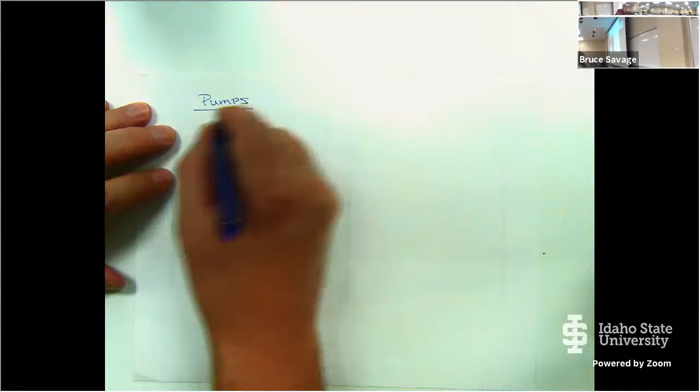So pumps. We can have positive displacement pumps. Positive displacement pumps, as we talked about on Wednesday, are pumps that are physically moving a volume of water or fluid, whether that is in an open system or a closed system.

A closed system would be like a screw that has a pipe around it, or gears that are moving. An open system would be like a fan, or you could even consider almost a boat impeller. You can argue over that too, but a boat impeller is actually moving fluid, whereas a plane propeller is creating a pressure differential. So there are slight differences, but you could almost consider those the same thing.

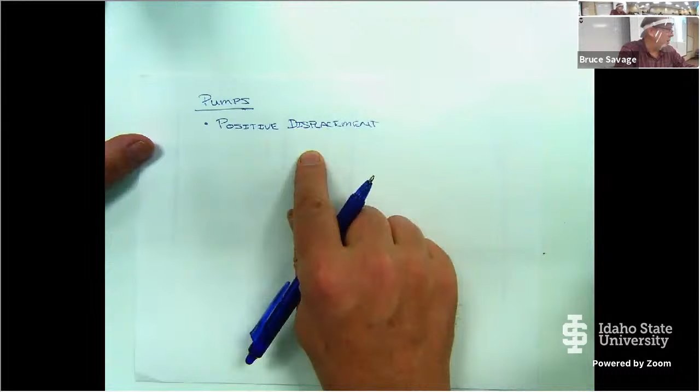But like a fan in a room that's moving air, that's pushing a positive volume of fluid in a given direction. So positive displacement pumps generally do not care about pressure so much, unless you reach a maximum pressure and they can no longer push. They push the same volume every time as long as it's within their system capabilities.

Civils use these all the time, like for water treatment. If we're putting fluoride or chlorine in the system, we want to meter out a certain volume of the fluid, and so those are fairly easy. You just hook them up to the system, set them for the volume you want, or connect it to your computer system, and it works great.

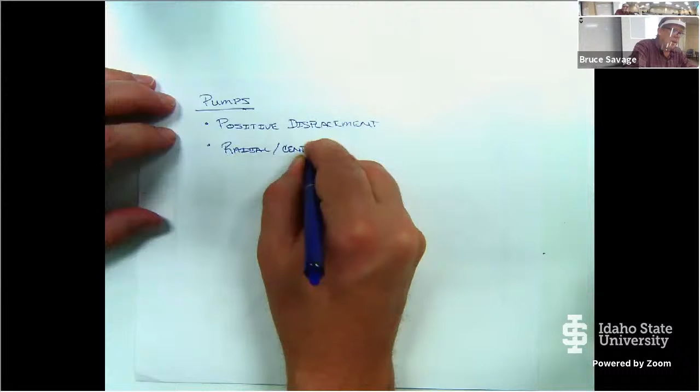The other type we talked about was the radial pumps, radial or centrifugal. I should be a little careful with this term radial because it actually has a dual meaning. We can actually classify a sub portion of these pumps by radial.

Let me show you a little picture here. Well, this is rather interesting. I finally got the book, and in fact they sent me two books now. I didn't get the original one, so I complained and said send me an electronic copy. They didn't, and all of a sudden two books show up, and I see that they've changed things. What is chapter 12 in the old book is now chapter 11 in this new book, which makes me interested.

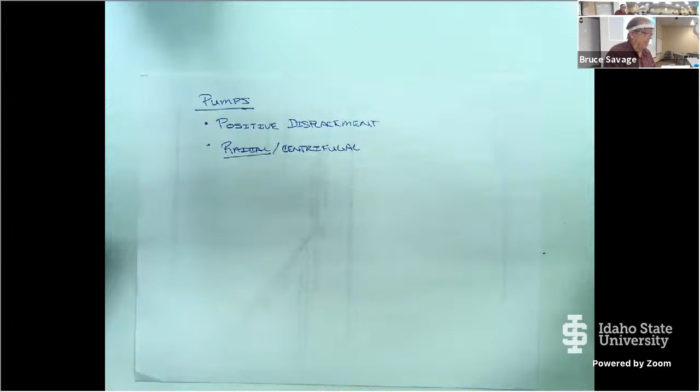I told you to read 12, because I was basing that on the old one. There's a while back, another one you told us to read. Oh, and it was different? Yeah. Oh well, I apologize, I thought the chapters were the same thing. I haven't even taken the time to pop this open. I just grabbed it today and said, okay, we're going to talk about this. So it's chapter 11, my apologies.

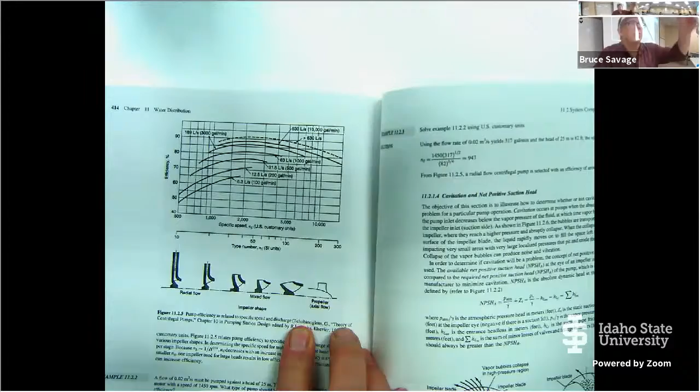We are on chapter 11 now. It's called Water Distribution. Let me zoom in right here. Okay, so there is a figure in here.

And this is 11.2.5. Pump efficiency is related to the specific speed and discharge. So this is a little bit difficult to understand, but...

Radial flow is like a disc that has curved vanes in it, and the water comes into the middle. The vane is like an arm that swings the fluid, except it's actually curved this way. So if it's rotating this way, it flings the fluid, and the farther out you get on that curve, the more rotational velocity you have, because there's a bigger lever arm, right? So it imparts a large amount of velocity to the fluid.

And then if you come over here, you have a propeller. This would be like your plane, or I think I called the boat an impeller, but actually it's an impeller if it's inside, a propeller if it's outside. We can also have propellers inside pumps, and those we call axial flow.

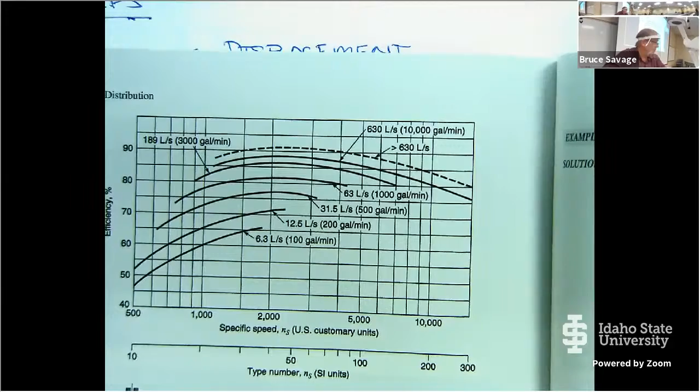And those are almost-- oh, I'm sorry, let me zoom back out here a little bit. Thank you for mentioning that. I really need a screen in front of me so I can see what's on there.

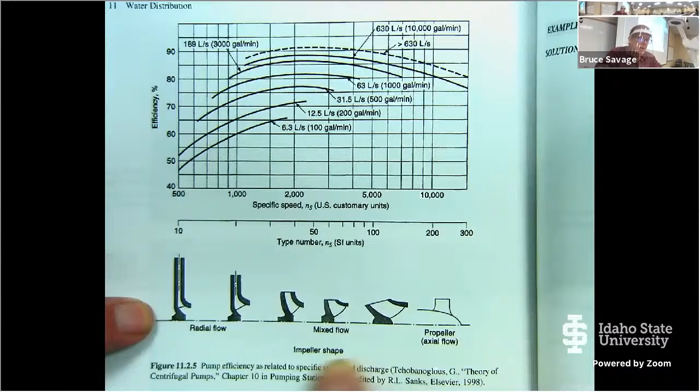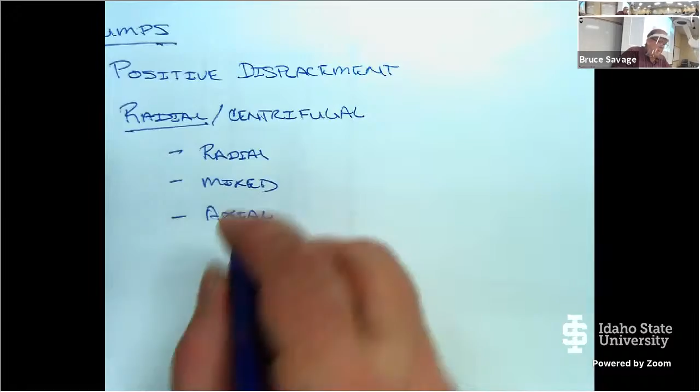All these radial, mixed, and propeller types are still centrifugal type pumps. We're going to talk about the characteristics of a centrifugal pump, but I want you to know how to pick which type of centrifugal. So underneath this right here, I could put specifically radial, mixed, and I would call it axial--rather than propeller, I like axial better.

Alright, so this is pretty easy. There's something called the specific speed, and it's down on the bottom of this page. Let me see if I can bring it up here. I'm not going to go through the derivation of this just yet, because we will get to this when we talk about the similarity laws, but specific speed is fairly simple.

So equation 11.2.7, the specific speed, noted as N sub S, is what we call the coefficient of Q to the 1/2, coefficient of H to the 3/4, and we break it all down. What it comes down to is this: the specific speed is N, that's the rotational speed of the pump, in RPMs--how fast is the pump rotating. N is RPMs, Q to the 1/2, and then the head that the pump adds, to the 3/4.

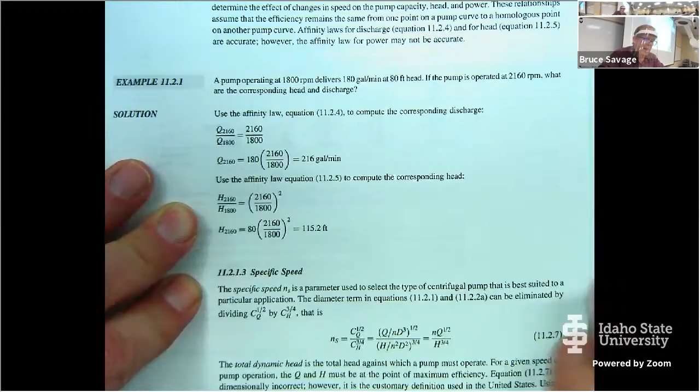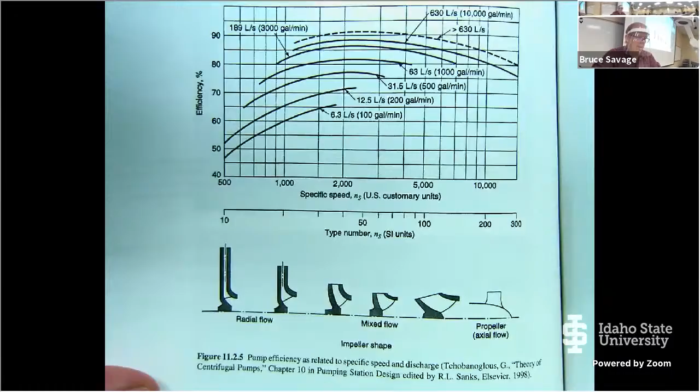So we can actually plug this in and calculate the specific speed. And if we do that, we can come back around over here and use this graph. Now you need to be careful: specific speed is usually calculated in the US system using gallons per minute, and head is in feet.

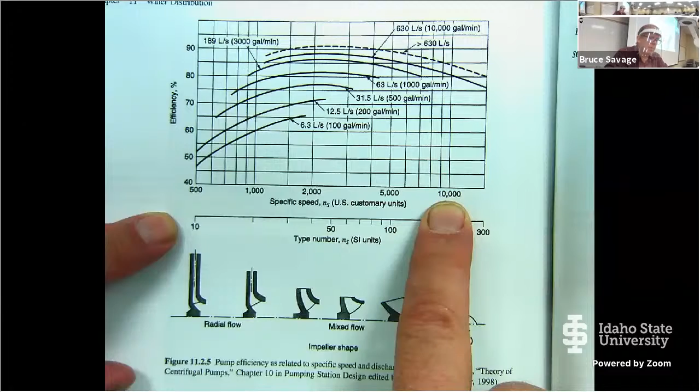Okay, if I remember correctly, yeah, that looks like it. So noting here, on this axis where my finger is at, we have the specific speed in US customary units, and down here on this axis, we have it in SI units. So let's say I had 2,000, I would come up here, and come straight down to this part down here. So at 2,000, I'd come down and say, oh, I want a mixed type impeller.

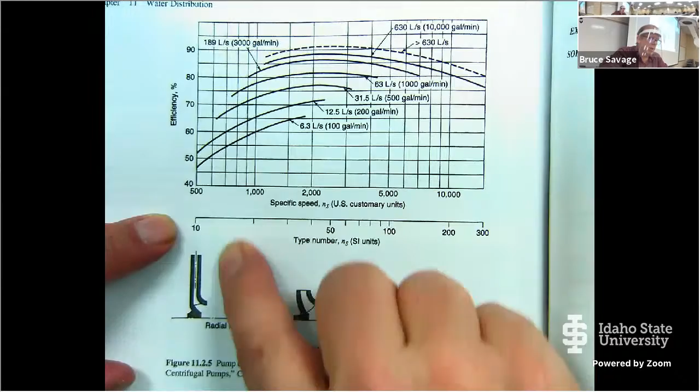Okay, if I'm over here, say at maybe--not 20, that's 500, so we'd say about 700--I'd want a pure radial flow. And here's the concept: we don't really use this to size pumps. We're going to get into pump curves, and that's where you actually size a pump. But this kind of tells you the type of centrifugal pump to give you an idea of how it's going to behave. Radial flow pumps are really good for high head, low flow.

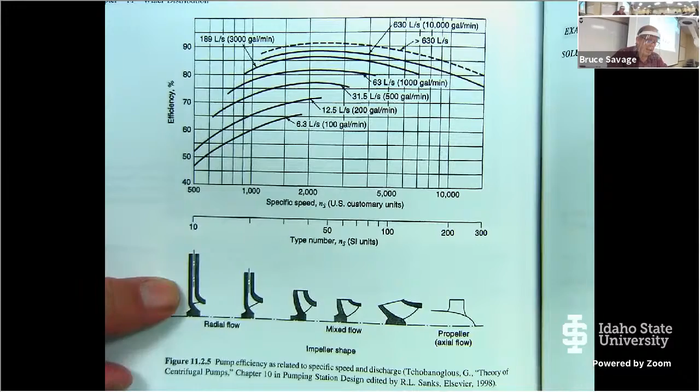So if you have to pump the water a long distance up, you're going to want a radial pump. If you need low head, high flow, you want axial flow. And if you get farther into pumps, those have a little more specific meaning to them, but I think we need to delve into how these pumps behave first before we go too much farther. So simply by using this equation, we can calculate, let me scoot this back up.

There's an example down here at the bottom of your book. So stick in the rotational speed, which is 1,450 revolutions per minute. In this case, it has a flow of 0.02 cubic meters per second, and we know we're pumping against a head of 25 meters. That gives us our specific speed.

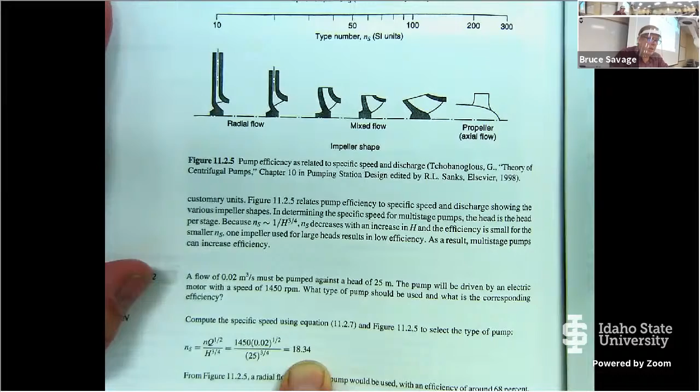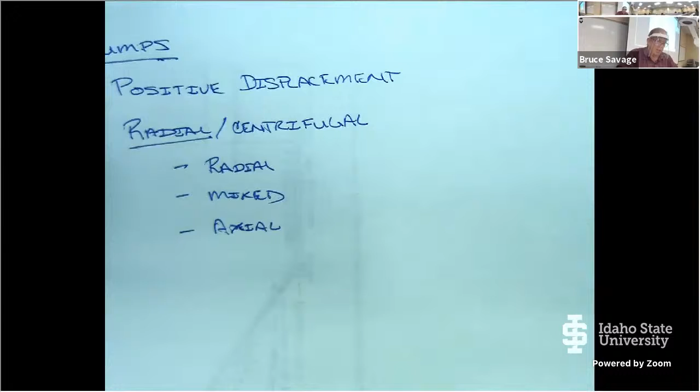Now, let's talk about characteristics. But before we do that, we want to define what's called a system curve.

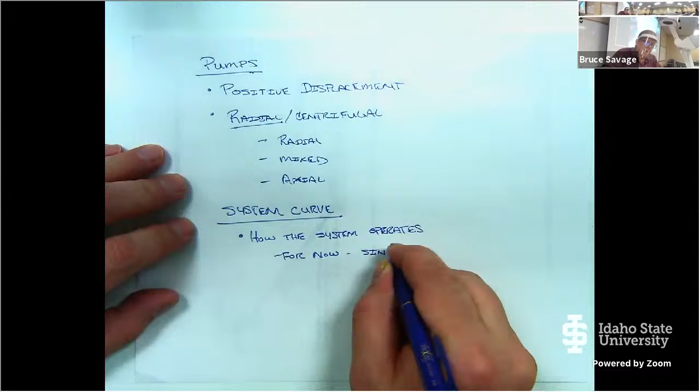A system curve would be defined as how the system operates. Right now, for now, we're going to use a single pipeline. We're going to go back to basics, single pipe, okay?

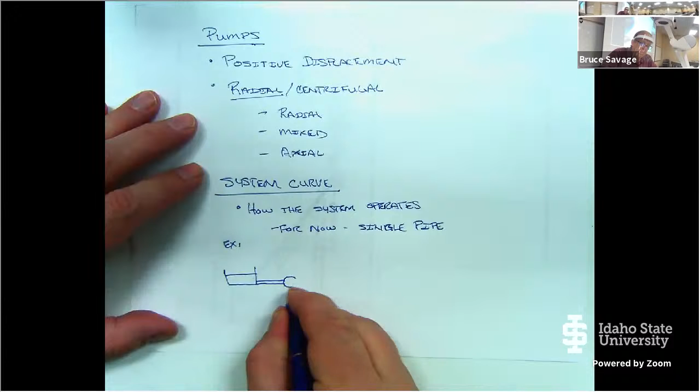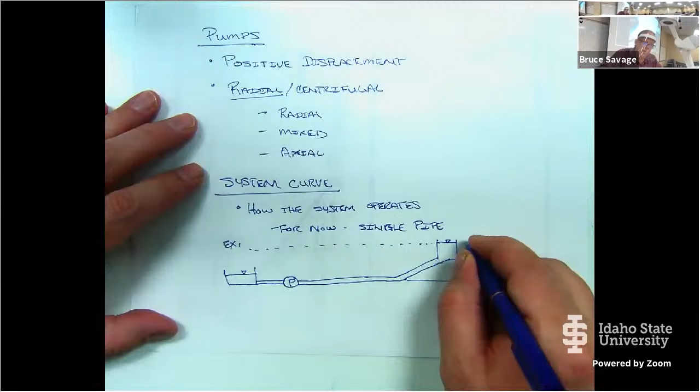So, a little example here, if you will. If I have a reservoir down here, and it's connected to a pump, and it pumps it over so far, and then goes up a hill, and fills some reservoir up on top of this hill. We can look at this as Z sub 2, and over here is Z sub 1.

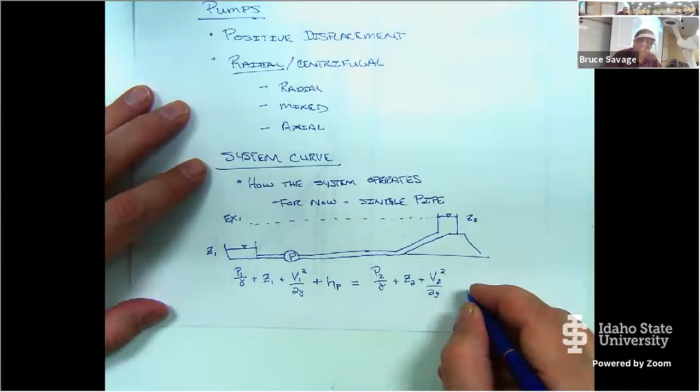So if I write my standard energy equation, P sub 1 over gamma plus Z sub 1 plus V sub 1 squared over 2G. Now I know I have a pump in there, and the pump's going to add energy, so I'm going to say plus the head of the pump, H sub P. And you got to be careful, we also use H sub P for horsepower, or HP for horsepower, not necessarily H sub P, but HP for horsepower. But this means head of the pump in this scenario, all right? That then is going to equal P sub 2 over gamma plus Z sub 2 plus V sub 2 squared over 2G plus the head loss, which we have now defined as CQ squared.

We've simplified friction times length over diameter. We've simplified all that, made it easier. So note that if I take this, P sub 1 goes to 0, P sub 2 goes to 0, V sub 1 goes to 0, and V sub 2 goes to 0.

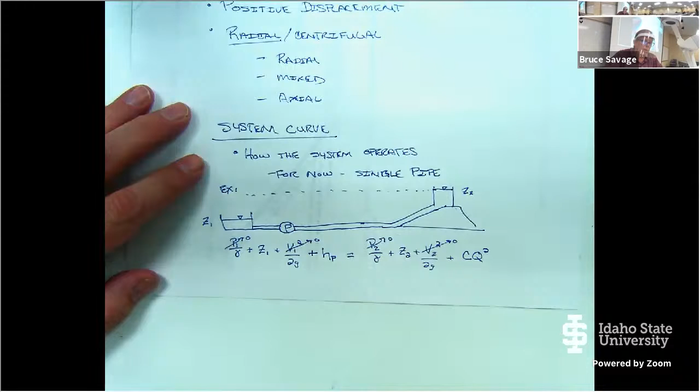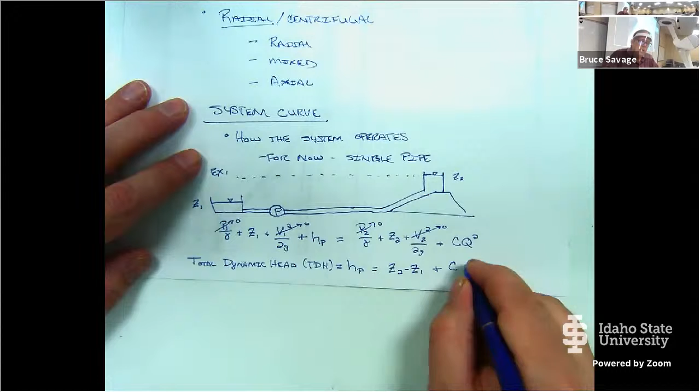And we're going to define something then as the total dynamic head, or TDH, total dynamic head, is equal to the head of the pump that's required for this system, H sub P, which now is equal to Z sub 2 minus Z sub 1 plus CQ squared. So now I can actually make one other change to this. The total dynamic head, the TDH, is equal to delta Z plus CQ squared.

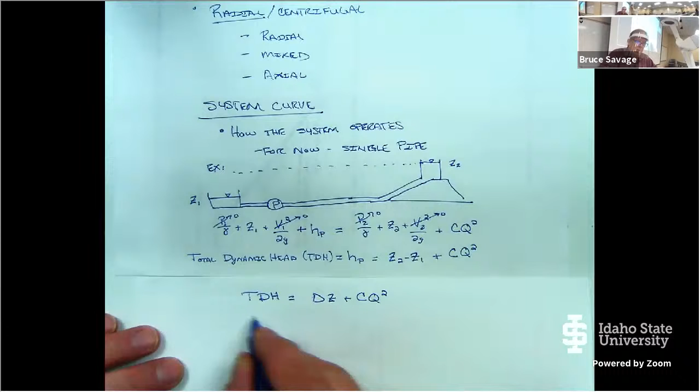This is the system curve. Right there is the system curve. Tells us how the system behaves. All right, let's look at the equation a little bit.

Before I can even get one drop of water to move in this system, I have to lift it up this distance, delta Z. I have to impart enough energy to lift it up to delta Z. So if my pump only has the ability to lift the fluid up 40 feet, and my difference in my reservoir is 50 feet, how much flow am I going to get? Absolutely none, right? Absolutely none.

But once I get flow moving, once I get a pump that will send it that high, as soon as I get it moving, now I have friction to overcome as well. So my pump has to overcome both friction and that delta Z. And the more flow I push through my system, what happens to the friction? The more flow I push through my system, the higher the velocity, therefore, the higher the friction, right? So we have this balancing act where I can push less flow and have less friction, but if I try to push more flow, then my friction goes up.

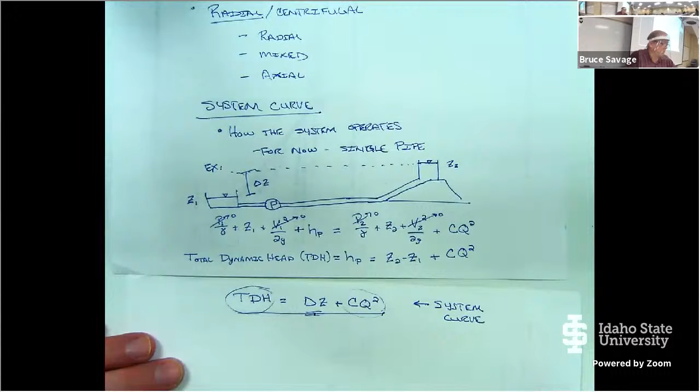Okay, so now we can look at a pump curve. Now, a pump curve, this is for, once again, centrifugal pumps only.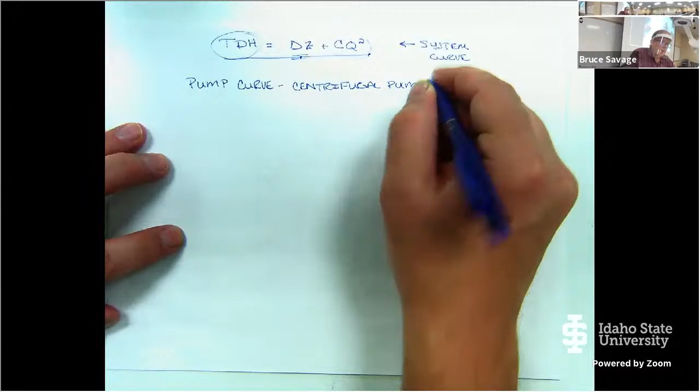Okay, rotational pumps.

So if we go ahead and define a standard Cartesian axis where we have flow on the bottom, Q, and head on the y-axis. Head is going to be defined as feet. Flow could be defined as cubic feet per second, cubic meters per second, but we generally do not do that in industry.

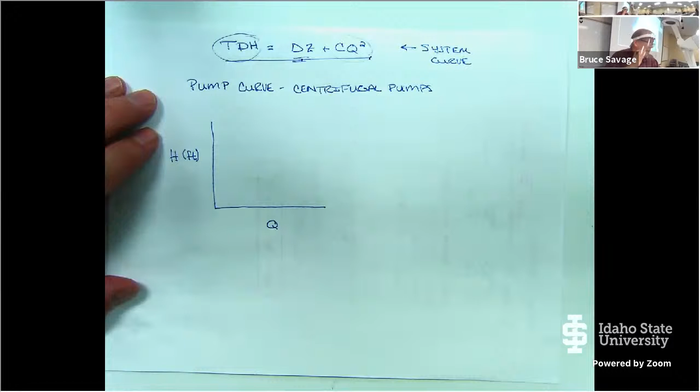When we buy a pump, it's based on gallons per minute, or a lot of times liters per second. Now, you got to be careful in the metric system. Sometimes it may be liters per minute. Sometimes it may be cubic feet, or I'm sorry, cubic meters per second.

I think we go back to figure 11.2.5, where we talk about that. I'll throw it back up here. They've shown it in liters per second, gallons per minute, which is the industry standard.

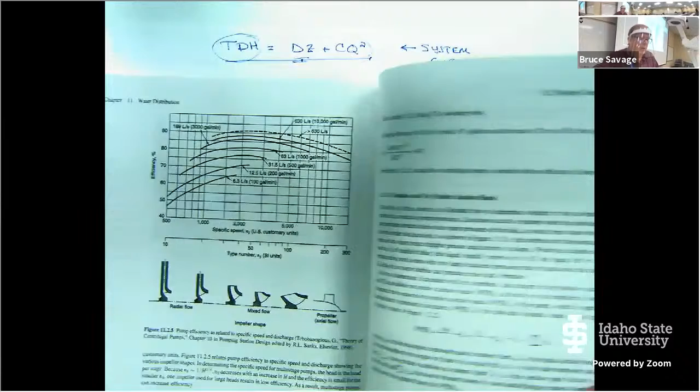Okay, now why do we do that? That's so you can make more money, right? You understand it, and the common person doesn't. But I'm half kidding there, but I'm half serious.

All right, so a pump curve then defines the operation of the pump. So pump operation parameters, let's say it that way. The pump curve defines the pump operation parameters.

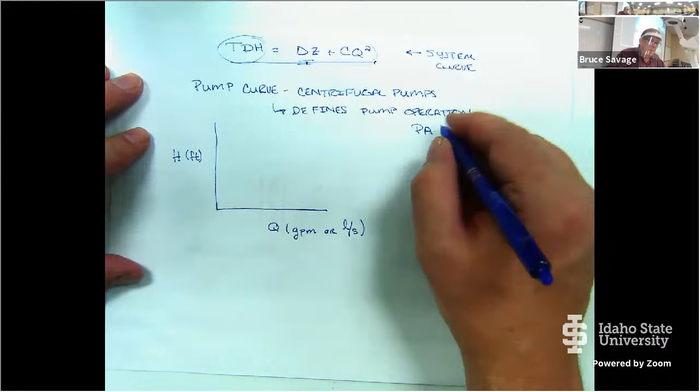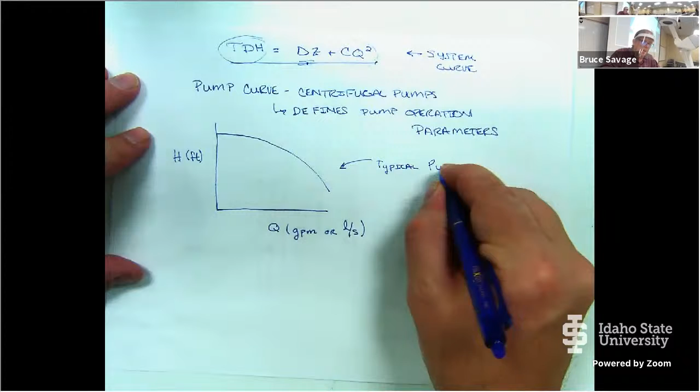Okay, so a typical pump curve looks something like this. So typical pump curve. The curve concept, pump curve, tells you that it's not linear necessarily. Now there are some pumps that behave close to being linear, but not all, and most of them have a little bit of curvature going on.

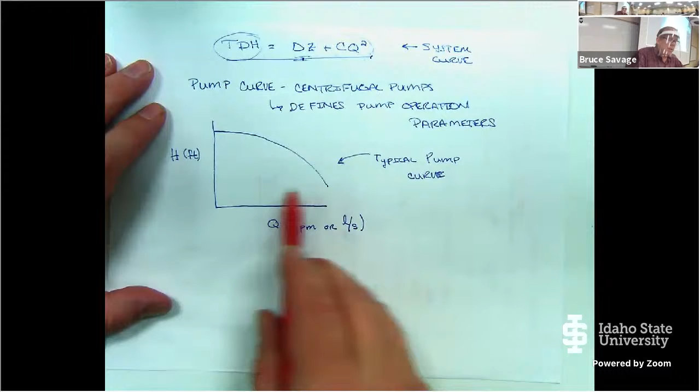We have also, so this curve then defines the relationship between flow and head. A pump can provide more flow if it has to be at less head. So if I'm pumping against this head right here, I can provide this flow. So this H sub 1 is correlated to Q sub 1, right?

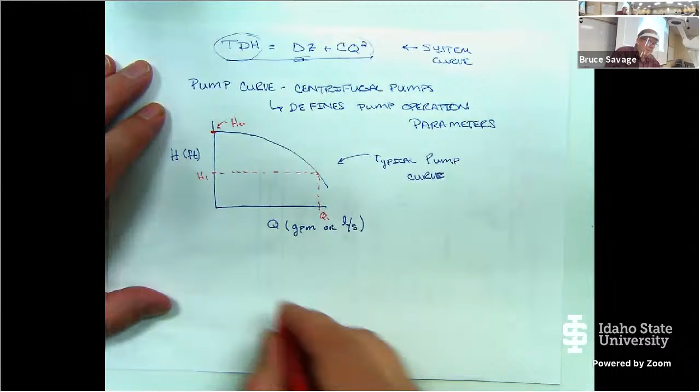I also have a point up here, I'm going to highlight, we're going to call this H sub naught. I'll come down here and say H sub naught is defined as the shutoff head. This means that if the pump is pumping up against a valve that is shut, it's pumping up against a dead line, there's nowhere for the water to go, it will add this amount of head to the system, but there's nowhere for that water to go.

And pumping against shutoff head is not good for pumps. They tend to cavitate, it tends to ruin them. So you don't want to do it for very long. If you did it for just a little bit, it's no big deal. But long-term operation, if your system has you pumping against shutoff head, you're going to be buying a lot of pumps. Okay, but nonetheless, this defines then kind of the head that is added when there is no flow.

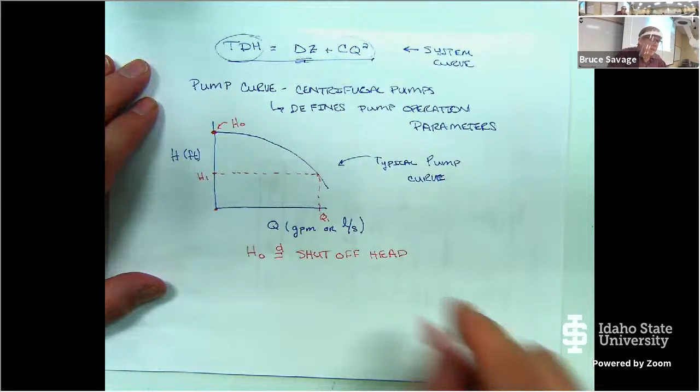Okay, and some pump curves actually have a little curve to them, so it's not always the highest head, but it's usually close, if not the highest. Once again, there could be a little bump right here since it is a curve.

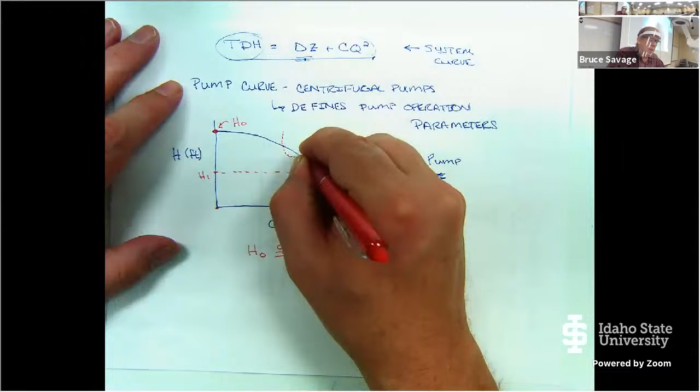All right, now that we have the shutoff head, we have the operation curve of the pump, we can now, well, there's also some other curves, or there's some other way of defining the efficiency of the pump. And usually this is with contour lines, but it could be defined with another curve.

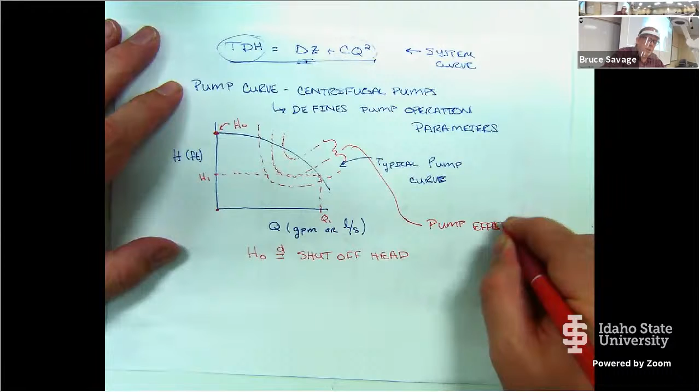Okay, so these curves right here represent then, I'm going to bring this down over here, the pump efficiency. Let's see, probably misspelled that, but how efficient is our pump? How efficient is it of adding power to our water system? Are we losing half of our power to operate this pump and the other half makes it to the water? Or does 80% go to the water and 20% go to the pump?

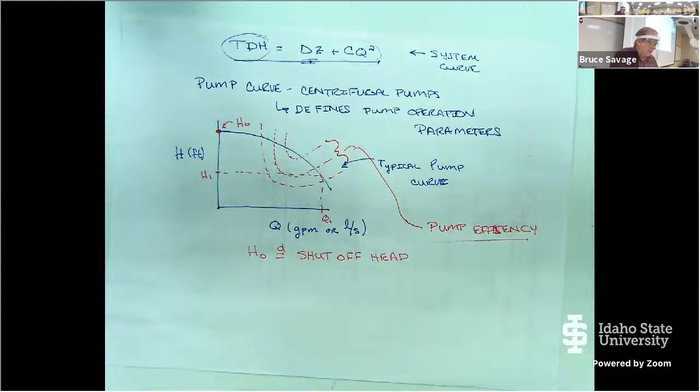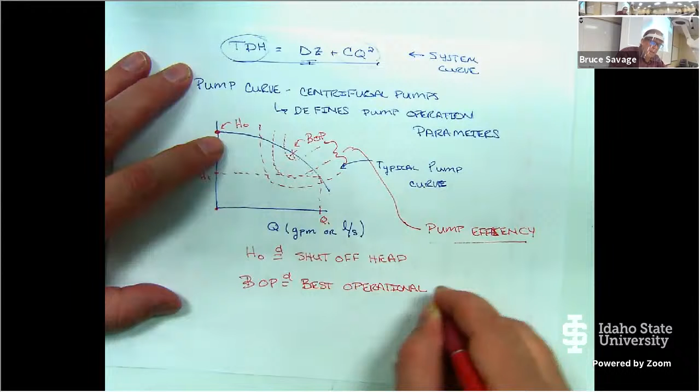Every mechanical device has some amount of inefficiencies, whether it's friction, loss to heat, whatever, they all occur, but these pump curves then define the efficiency, all right? And there's going to be, at the highest efficiency right there, we call that BOP. The BOP is defined as the best operational point, which is the highest efficiency.

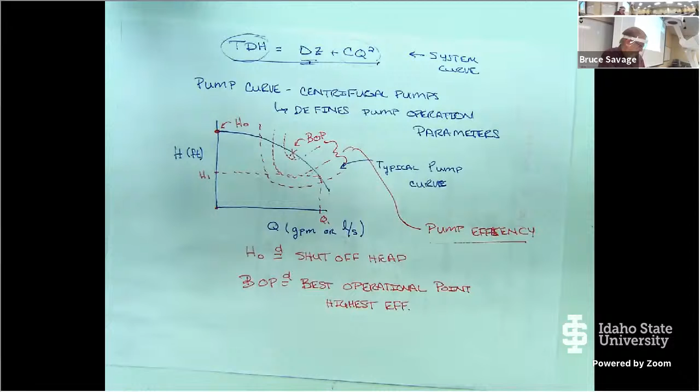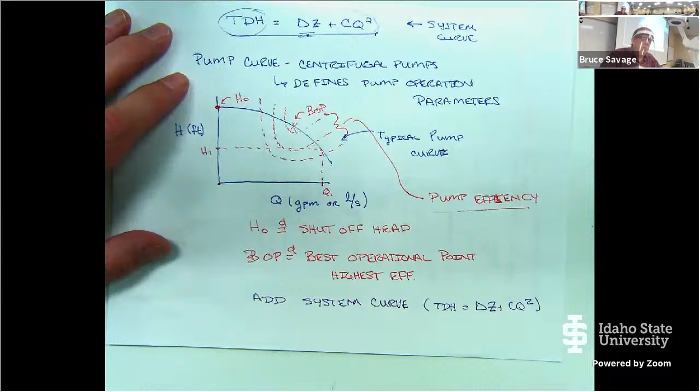Now, if I overlay my pump, let me flip this around. If I overlay my system curve onto my pump curve, so let's say now we want to add system curve. Okay, so remember the system curve, the total dynamic head is equal to delta Z plus CQ squared. So immediately I have some delta Z on my figure that I have to jump up to. So I'll come over here, and this right here then represents delta Z. I have to at least add that amount of energy before I get one drop to flow in my system.

And now I'm going to plot my pump curve. I'm sorry, I'm going to plot my system curve onto my pump curve. This then is my system curve.

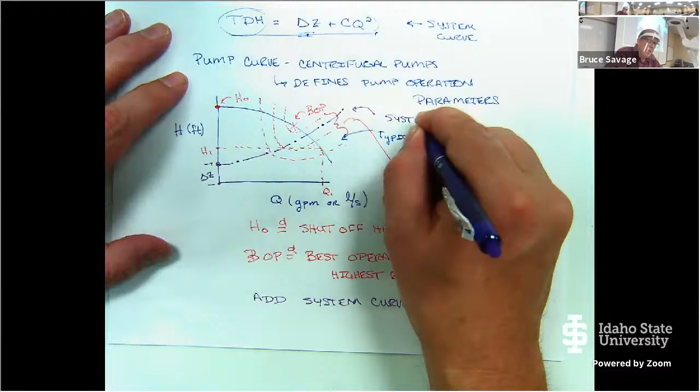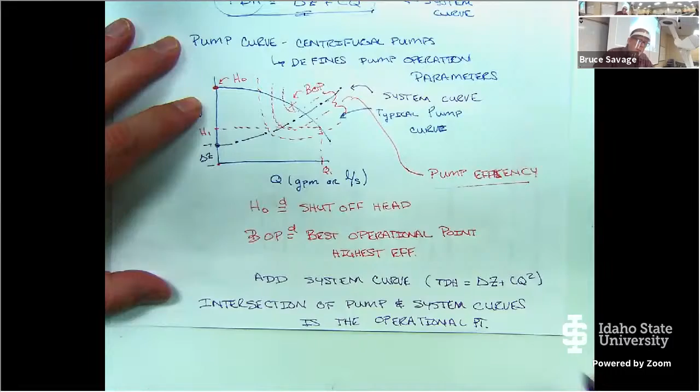The intersection of pump and system curves is the operational point. So let me go up there on my graph and we'll highlight that right up there. And that becomes then the operation point.

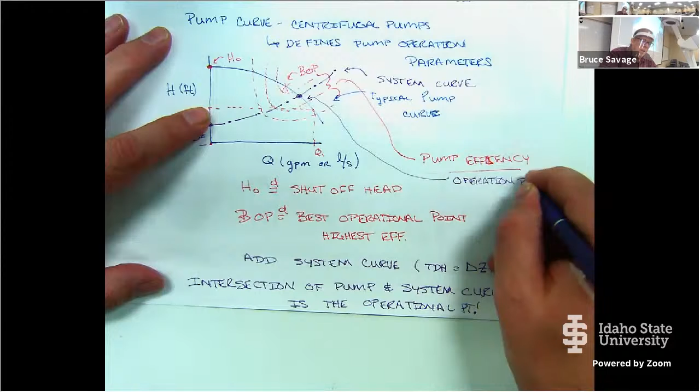That's how much is now flowing in my system.

So if I have a system that has a valve at the end of it, pumping water from one pond up to another pond on top of a hill, and I crank my valve down, what's going to happen to my flow rate? It's going to go down. What's the mechanics of it going down? What's the math behind it? You're increasing the K, the resistance in the fitting, and that increases the head loss in the system, which decreases the flow rate.

Good, so good. For those online, if you didn't hear that, by turning the valve down, we're going to increase our minor loss coefficient, the K, which is going to change our C value, which is going to increase the amount of minor loss in our total system. Mathematically, that gives us more head loss overall.

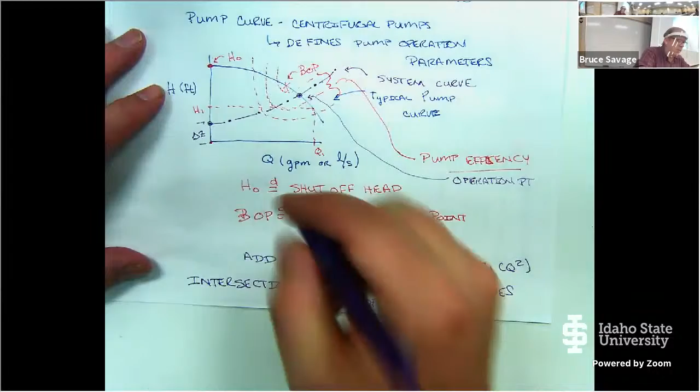On the figure, how does that work? If I change the C value and make it bigger, my curve is going to be more sharp, so my curve is going to come up here. This right here is the increase in losses. And now I've just changed my operation point, so now I have less flow pushing up against a higher head because I'm burning that head up in my valve.

And likewise, if I start to open the valve, now that curve changes, right? So I can now find where if I take a pump and stick it in a system, and if I know the curve for that pump, I can now define where my system is going to operate.

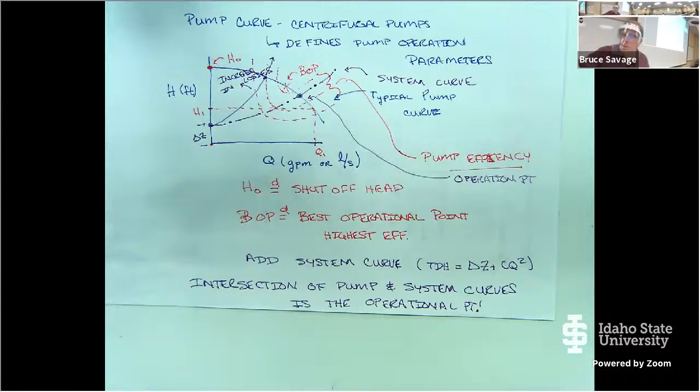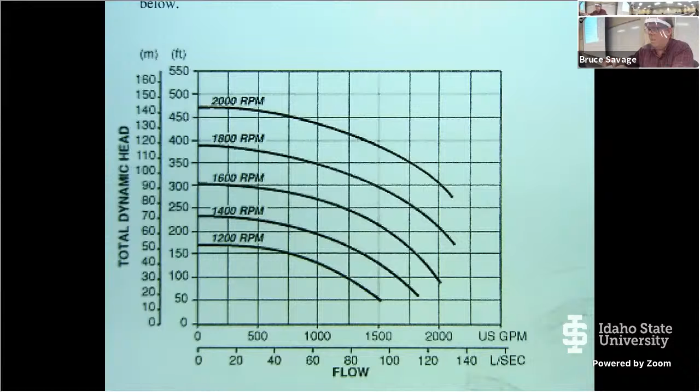Right there, I just had it here. Okay, so here's a simple pump curve, but it doesn't have the efficiencies on it. Let me grab this one here. This one does. Actually, do this one instead. Now this one doesn't have very much curve to it. That's okay because some of them don't.

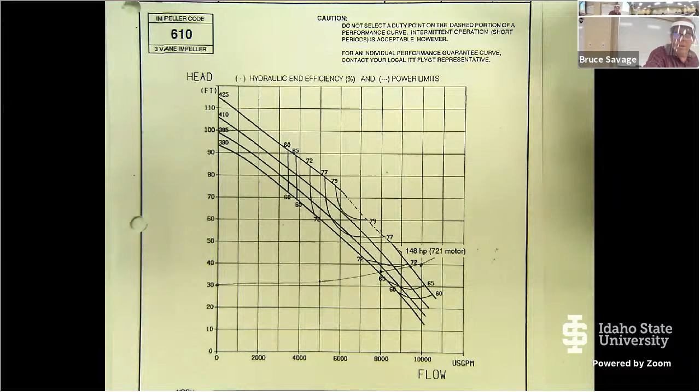Okay, so let's talk about back in the day, before the internet, which was not too long ago, by the way. You guys, well, it's always been here since you were born, huh? But it hasn't been around that long. We didn't have access to this on the internet, so pump companies would send out these big old binders, like a 3 to 5 inch binder. And when you needed to find a pump, you would pick a particular company, you'd start looking, and there's ways to narrow it down. It's not like you'd go through every page, and I'll show you how you can narrow it down. And you'd get the pump.

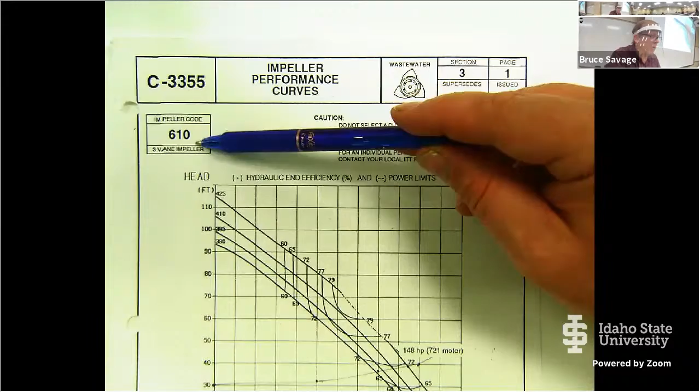Okay, so this particular pump is a wastewater pump, and this is the performance, the pump curve, okay? The model is C3355, with an impeller code of 610. Come down here and you'll notice that there are multiple lines, but this follows the standard procedure. On the bottom, the x-axis, we have the flow in gallons per minute. On the y-axis, we have the head in feet. Then we have these different pump curves coming down. Now, these little numbers, 425, 410, 395, and 380, I'll talk about those in a minute. But here we have these other numbers, 79, 77, 72, and so forth. These are the efficiencies, all right?

Now, if I have a pump, let's say that I put a random line, and this line kind of goes dashed because they say if you're going to do this much right here, you need the 148 horsepower motor. But if you're not there, there's another motor you can use. If I just come over here and draw and say this is my system curve right there, and if I was using the 410 impeller code, then I would be operating right here, pushing about 74 feet of head in my system at 6,000 gallons per minute, and my efficiency would be 79%. Now it may be a little more, maybe 80 or so, but I can't say that. All I can say in between those is 79. If they had a little plus symbol in here with 80, I could guess a bit, but my pump is going to operate at 79% efficiency. My whole system then is going to be 6,000 gallons per minute at 74 feet of head. Any questions on that?

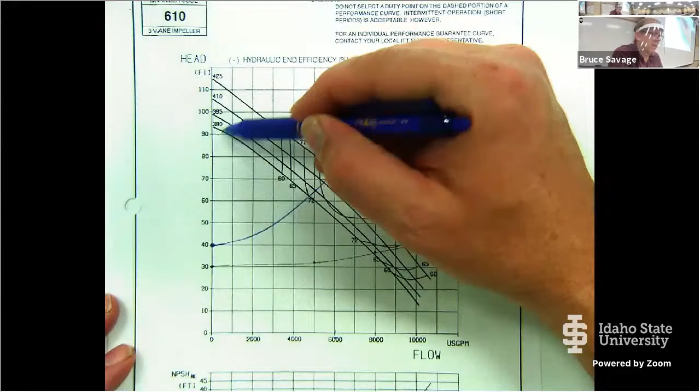All right, let's talk about these curves up here. These curves represent what we call trimmed impellers.

So a pump has the casing, that's the outside of the pump, and the inside we have an impeller. Sometimes that impeller is designed to be very tight fitting, with very small tolerances between the pump casing and the impeller. Sometimes there's a little bit bigger holes between them, if you will.

Wastewater pumps are sometimes designed to pass kind of large solids. In fact, one pump company wanted to see if they could pass golf balls through their pump. So they did, and it worked.

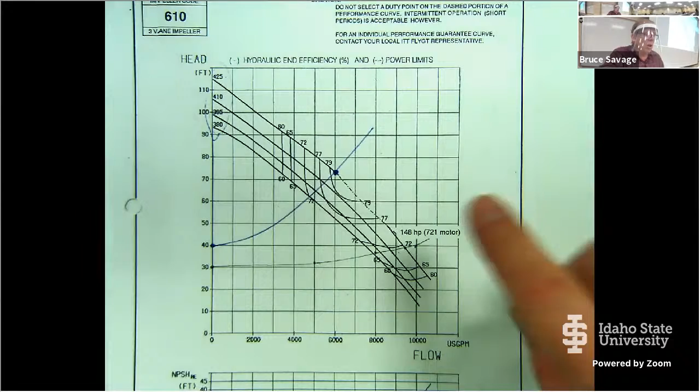So you can also come in and do what's called trim the impeller. You're going to use the same model of pump, you're just going to pull out the impeller and stick a different one in. It's usually a smaller one, which gives you a little bigger gap there, which actually decreases the performance, but there are reasons for this sometimes, okay?

So for example, if I had decided to use the 380 impeller with my system, I would be down at 72%, but my flow would be closer to 4,800 gallons per minute at a lower head, okay? Now, if I'm always throttling my system because it provides too much flow, it may be to my advantage to trim the impeller, all right?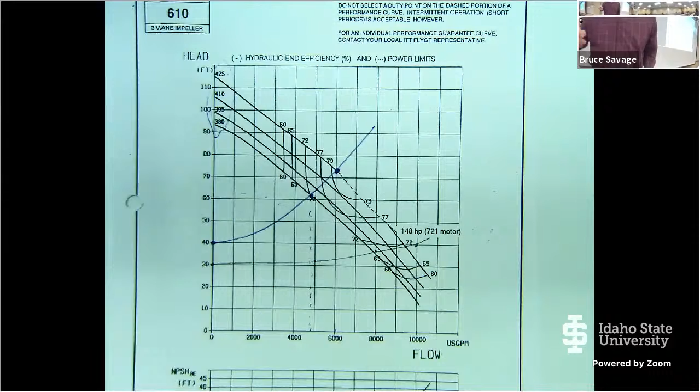Now, I would note that there is a variation to this, and it wasn't that popular. It has existed for years, but it's only gotten popular, I'd say, in the last 10 years, of what's called a variable speed drive, a variable frequency drive. Due to electronics getting better, now we can change the rotational speed of the pump. Rather than changing the impeller, we're going to slow the pump down, which is going to change the performance of the pump. So we'll talk about variable speed drives in another lecture. But understand there's a couple ways of changing your pump. You can change it either by trimming the impeller or slowing the rotation down.

All right. Why is the efficiency important? So we talked a little bit in this class, I believe, about power, correct? I'm trying to think, when did we talk about power? I remember going through it, I think. Did we or did we not? Or maybe I'm mixing it up.

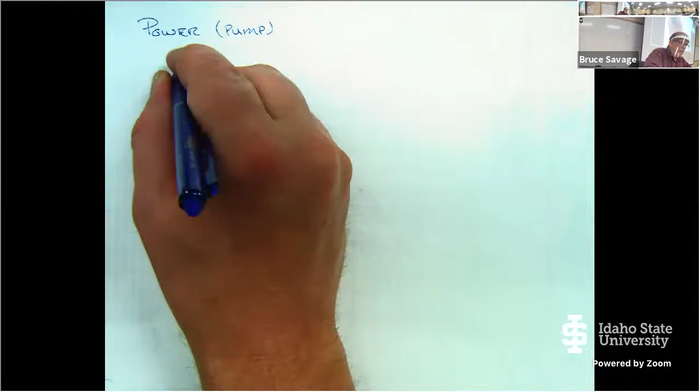I'll have to go back and look at my notes. But power, then, in a pump, P is equal to gamma QH, where gamma is the specific weight, Q is the flow rate, and H is the head. This is the amount of power, okay?

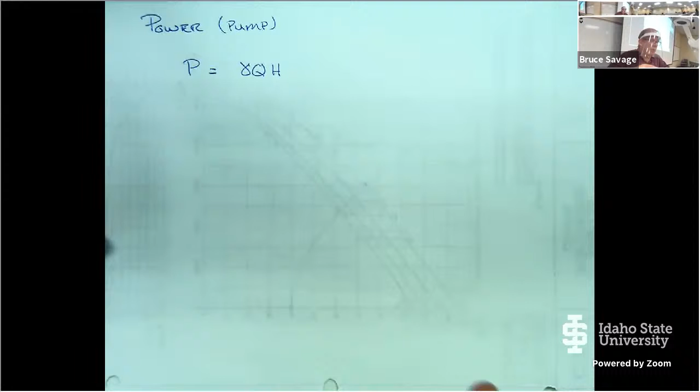Now, we could derive this equation. It's not that hard to derive because force is equal to power times... work is force times distance. Power is force times distance per time. And we can actually then take the force. The force is going to be the specific weight of the water times the volume of water. That's where the time comes in. And we kind of break everything up and we end up in the gamma QH, okay?

But power in terms of horsepower is equal to gamma QH divided by 550, okay? So this right here is the general equation. It doesn't matter what system you're using. It's going to give you foot-pounds per second, or it's going to give you joules per second, okay? Which is, by the way, watts, right?

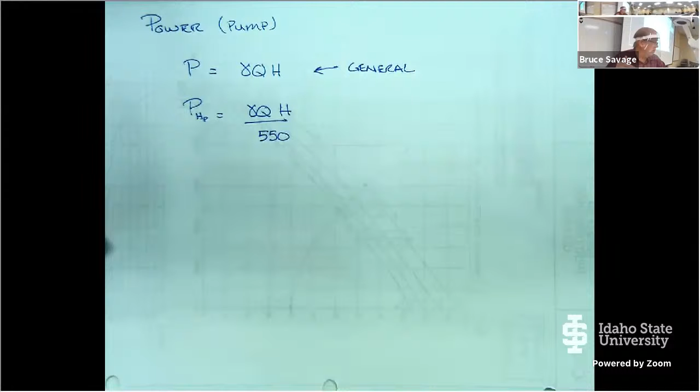Now, if we want it in terms of horsepower, because in the English system, that's what we use to define power a lot, is horsepower. So there's 550 foot-pounds per second in 1 horsepower. So divided by 550 now gives us the power in horsepower. If we want power in kilowatts, then it is gamma QH divided by 1,000 because there's 1,000 watts in 1 kilowatt. So unit-wise, this goes to kilowatts. Unit-wise, this goes to horsepower.

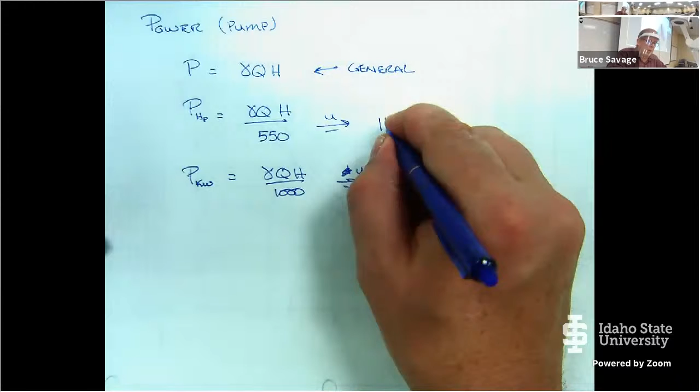Okay. Now, an interesting thing is that we rate our pumps based on the motor, but then we also sell electricity in kilowatts or kilowatt hours. So it's like we have to always do this conversion. But before we go there, note that a pump has an inefficiency.

So if this is what we call the water power, P, so water power, water horsepower, that's equal to gamma QH divided by 550 times the efficiency of the pump. No, I'm sorry. Well, that is correct. Is that correct? Okay. This is the brake horsepower. Sorry, that's not the water horsepower, the brake horsepower. This right here is the water horsepower.

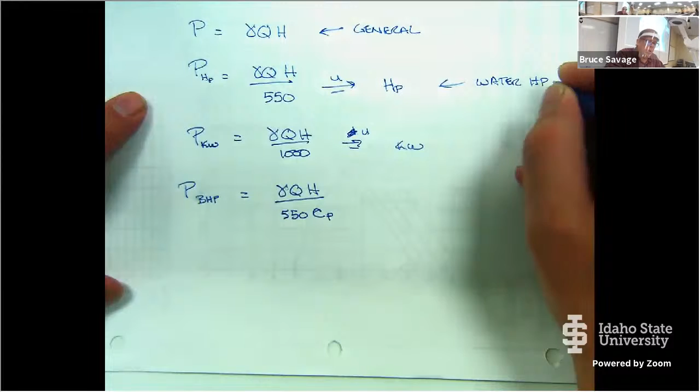That's the amount of energy that's going into the water. But in order to get that amount of energy to go into the water, we have to provide a certain amount of energy to the pump. And that's where the efficiency of the pump comes in, where E sub P then is the efficiency of the pump.

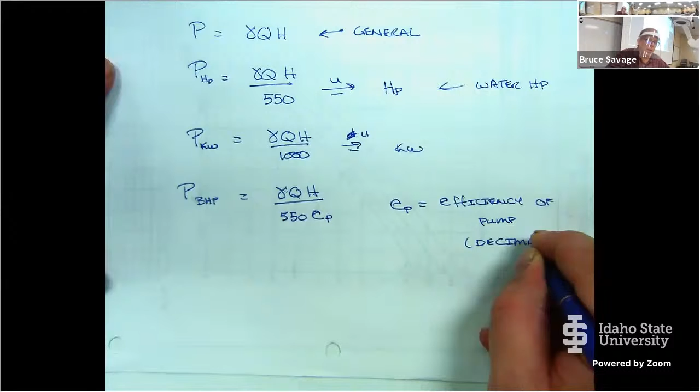Is that taken as a percent or a decimal? Decimal. That's a good question, because it just reduces it. Or in this case, it actually increases it, because if you divide this by something that's less than 1, it's going to increase this number. Which means if I'm providing so much brake horsepower to my system, I have to provide water horsepower to my system, I have to provide a certain amount of brake horsepower to my pump.

Then we also have the efficiency of the motor, E sub m equals the efficiency of the motor. A lot of people don't realize that pumps and motors are separate. If you go to Lowe's or Home Depot and buy a small submersible pump, they look the same because they're combined, they're in one unit. But in reality, you have a motor, and then it has a shaft, and it goes to the pump. So the pump has an efficiency, the motor has an efficiency.

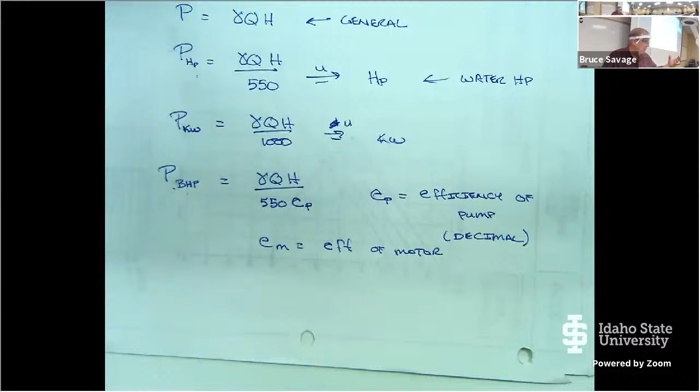We're not going to get into the electrical rating of motors. You can generally get that from the manufacturer, but this is generally around 75 to 80%. Motors are pretty good, maybe 82. Some really high efficiency motors may go a little higher. But if we want to know the total power going to the motor, how much electricity do I have to provide to the motor, then P total is equal to gamma Q H divided by the efficiency of the pump, divided by the efficiency of the motor.

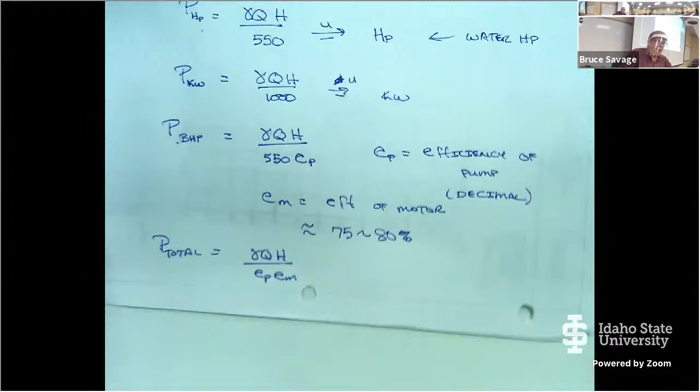Now, I haven't done any conversion here to horsepower or kilowatts yet, so this applies the same either way. If I were using the English system, this would give me the total amount of power in pound-feet per second. And this would be the total amount of power in watts for the metric system. So if I want it in terms of horsepower, I divide by 550. If I want it in terms of kilowatts, using the SI system, I divide by 1,000.

But if I'm doing work in the English system, gallons per minute and so forth, which I have to convert to cubic feet per second, by the way, and I want to turn it into the power for electricity to calculate how much electricity my pump's using, I'm going to have to do the conversion from feet and cubic feet per second over to kilowatts. We don't have time today to go through that conversion. It ends up being a single number, but I want to spend a little more time on it because they've done some screwy stuff in industry with it. I want to show you why you can use either one of two numbers and still be correct.

So with that, any questions about power and pumps, pump curves, system curves? You should now be able to calculate the system curve. You already have that ability with Bernoulli, with the energy equation. And then if you're given a pump curve, such as this one, you should be able to plot the system curve on top of the pump curve. Now, how many points does it take to plot a curve? How many points to plot a line? Two. So a curve? Three, right? To do a reasonable approximation of a curve, you need at least three points.

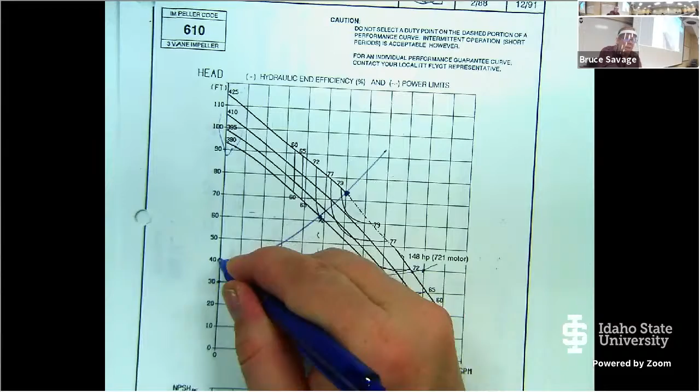So one of those points, you can say, what is the delta Z? You pick a point out here, pick another point out here, and draw a curve in. So if you're given a pump curve, you can draw a system curve on top of it, and where they intersect is going to give you the operational point of that system.

Now, on Monday, we'll go through a full example. I'm going to assign you one problem from the book to deal with the specific speed. It's fairly simple. I may give you a problem on this to at least get started, and then we're going to build on this. We'll work an example on Monday, and also talk about power and build on this to keep going with pumps.